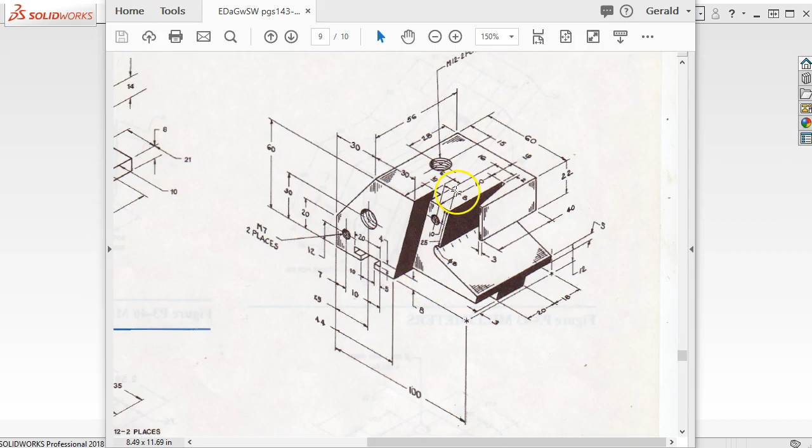We are in metric, and this has a pretty good feel to be a layout sketch.

File new, part metric. Go into the front plane, and first thing is just to get an envelope, start it on size. So 60 by 100, and what that'll let me do is zoom to fit, and then we can start putting in other geometries. So the angle on front...

Can go in at 20, and then we have 30, so base edge.

Okay, what else? L on the keyboard for the line command. We'll bring that at a little bit of an angle. Watching one of the issues is that we're going to start getting a lot of inferences. So coincident, but not midpoint. So that's good.

A distance of 44 to the edge, and the top is another 30.

Alright, the T-slot then, let's just go rectangular, and that dimension will be 20. Let's see, 4 on the height, and then position.

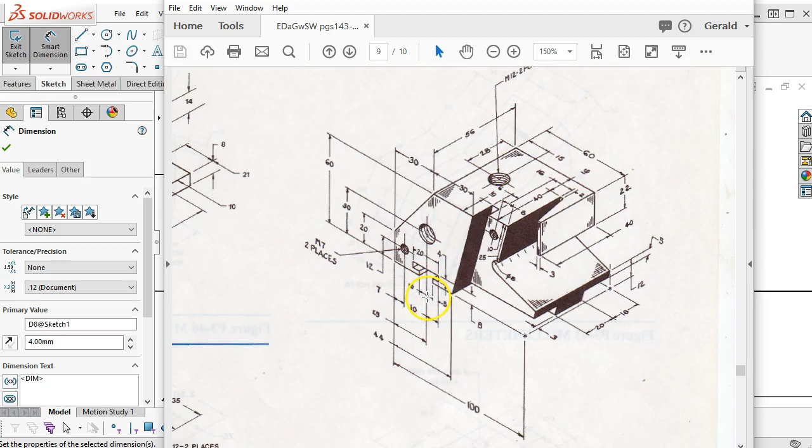Well, kind of looks like—and there we go again making assumptions—but kind of looks like it's on center with the threaded hole. And so if that's the case, then our dimension would be at 17. And I minimized that when I really just wanted to move it out of the way.

There we go. So that being the case, let's go into the center line. And we'll pick an edge and we'll just go ahead and bring that all the way up. Place our dimension.

Yeah, 30 to the edge. It wasn't—it was 10 millimeters to center. There we go, 25 millimeters.

Alright, so 25 millimeters—the 10 millimeters that was in here is actually splitting the 20 millimeters for the sides, and then the bottom of the groove is 10 millimeters. So that goes to 25. That looks a little bit better.

We can pick the midpoint, make it coincident. And we'll drop in a couple of the T-slot lines. Go ahead and mirror those.

So that was 10, and that depth is 5. Okay.

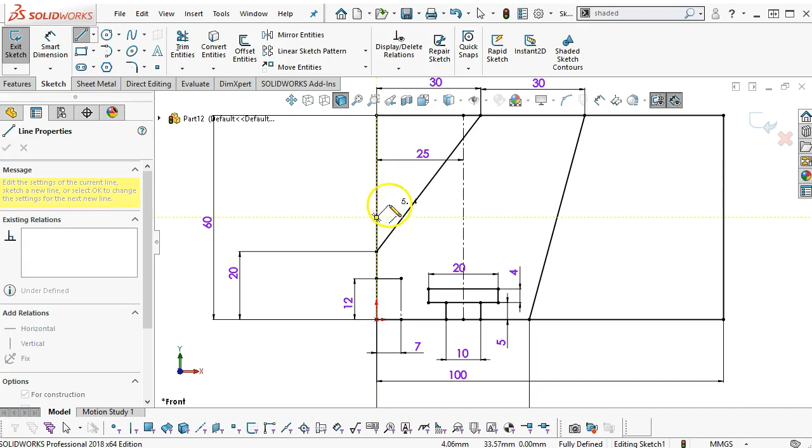Well, that grabbed midpoint. I'll let it have it, go back and delete it. Also grab midpoint of the other side. Yeah, pretty much, so we want coincident.

And then that is 30 millimeters to the intersection. Okay, so that gets some geometry. Let's see.

Well, that one went midpoint. It's not really showing me parallel. There's my inference for parallel, and it's just a touch off center line. And based on the way that this is dimensioned, it won't be between the two lines, it'll be between the two endpoints. Okay, and that'll make a little bit of a difference on the geometry.

So center of the hole, offset, slot. And then assuming that those are going to stay parallel—nope, not allowing me to pick it up. There we go.

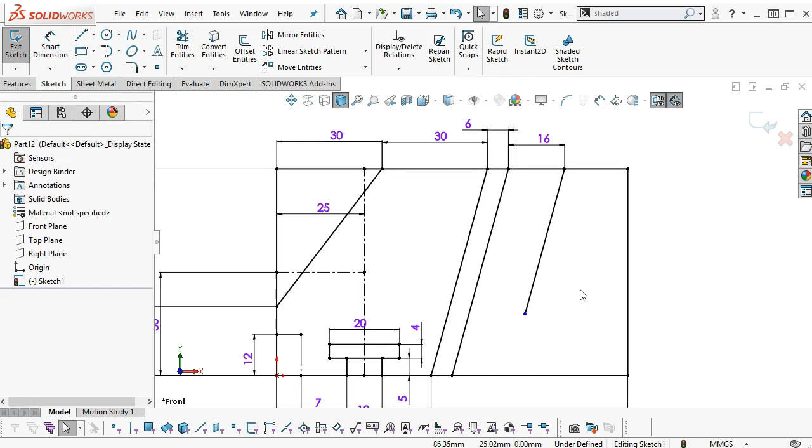Alright, so that does have a little bit coming back this way, and if that's the far end, and that comes off perpendicular, and kind of hard to tell on the dimension what it's looking for there, comes back across to the intersection, horizontal.

Okay, so 5, and then the height becomes 12. We have a length across that line of 25. So we're going to need an intersection.

Let's see, diameter is 8 here in the corner, and I have to assume intersection.

Okay, so rather than trimming those out, I can put a point, but then I can also go to split entities, which is tools, sketch tools, split entities, and we'll split the line and miss it.

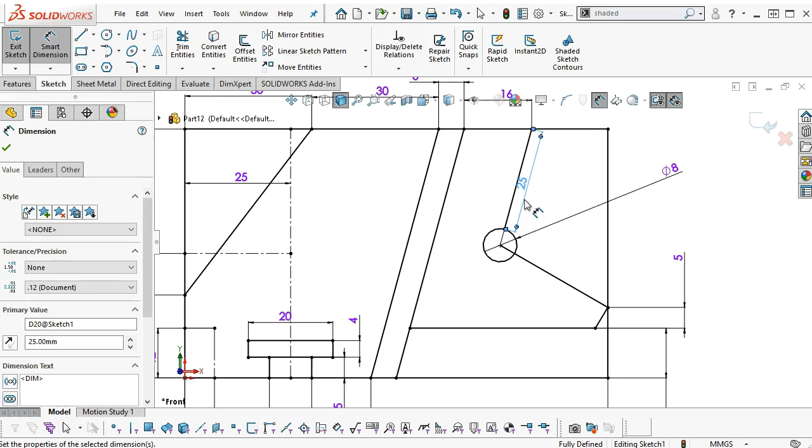It's not too bad. So starting to get some definition.

Okay, and then we'll go 10 millimeters down and 8 millimeters in. And grab the midpoint, so we'll get rid of that. Switch it to coincident.

Okay, so we've got that. There's a 2 millimeter gap, but that one's going to end up being vertical. So from the end point to the line, 2 millimeters, and then another 3 millimeters. Let's go ahead and put the 22 height in.

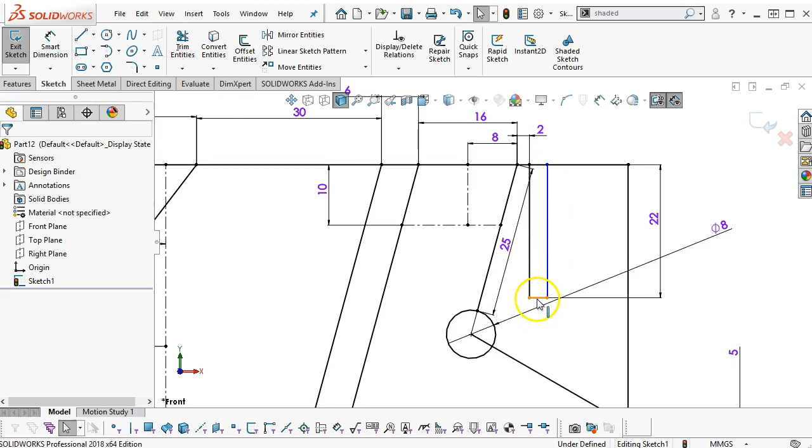And we'll go ahead and close that off. And we have a 2 millimeter on the end. So that's where the inside edge stops at. And we need to figure out where the angle back goes to. So 60 millimeter.

I'll stop there. 3 millimeter. Alright, so that gives the depth. Oh, still managed to miss it. Alright, so, not horizontal. Okay.

So we're going from that point over and then back. Okay, so a whole lot of lines, and we'll try to start making definition out of that.

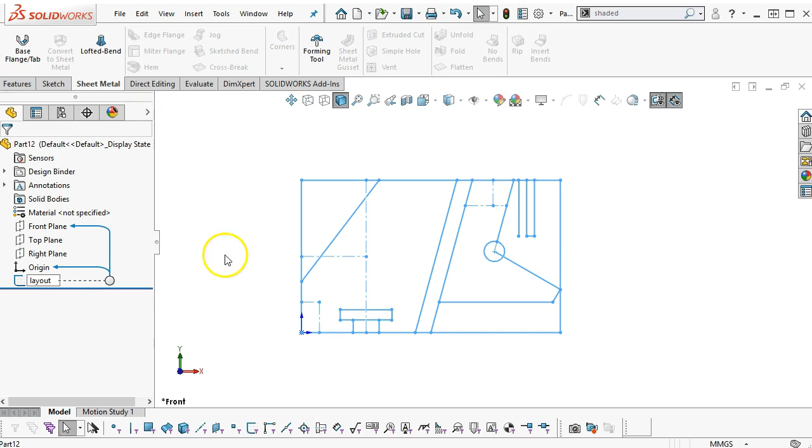So since this is the layout sketch, and I just invested 10 minutes into making that, I'd like to make sure I don't crash and lose it. So this is going to get saved. 341.

Okay, so generating the first geometry. We will go back to the front plane, or into the front plane, and we'll just trace over top. We can convert geometry here in a little bit. So if I trace, I'm just going point to point, making coincident at each of those endpoints or intersections.

Okay, so that gives me my first piece of geometry. Features extrude. We're going to go ahead and take it to the back. 56 for the depth. All right, and then the front face in here that matches up.

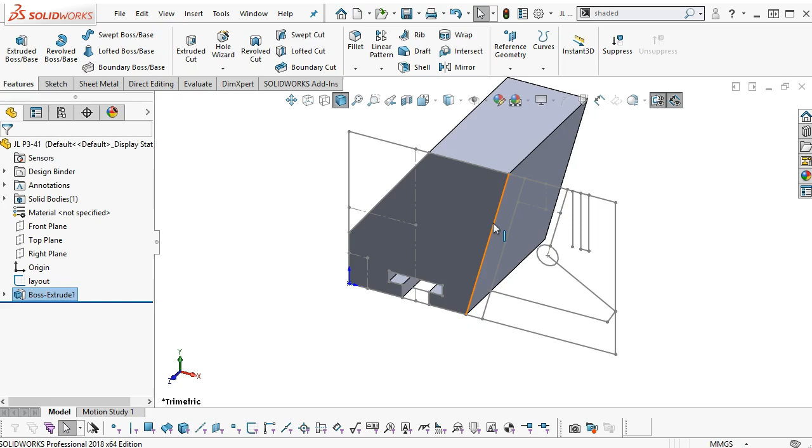We're going to end up with a depth backwards off of that face. So, well, let's go ahead and sketch off of that side. We'll bring it forward. Okay, so convert entity. Convert entity. I think I'm going to go ahead and bring it this way.

And the intersection. This one I think we will trim. So convert entities, and then trim entities, trim to closest, removes the notch. Oh, you know, that was tangent, wasn't it? Darn it.

Okay, so if we make that correction here, okay, so we take the on edge off, and let's see, one of the coincidences, I'll bring that back and go tangent. Okay, so this is still 25 millimeters. That comes back to its edge, and I'll have to correct that in the layout.

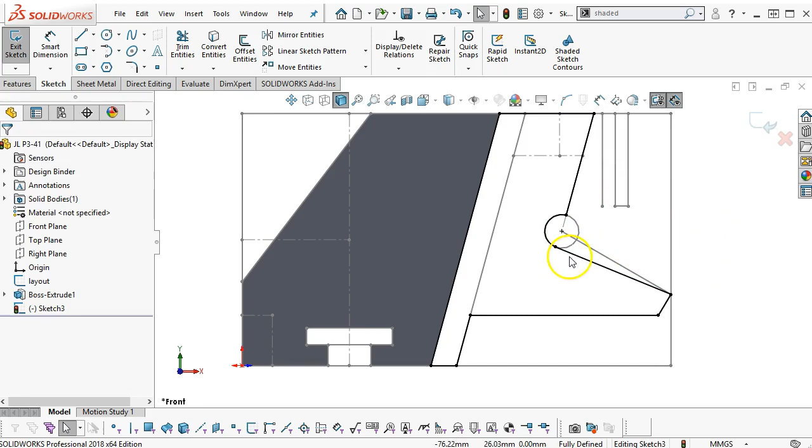Alright, so based on our dimension, we have 16 and 40, so 10 millimeters shy. So features, extrude boss base. This is going to go 46 millimeters. And we'll reverse the direction, bring it up to the geometry.

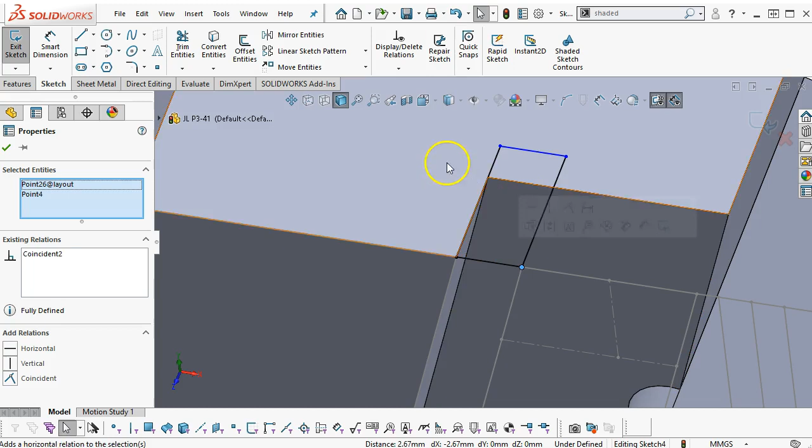Okay, on the 46 then we have a notch that comes out from that point, so sketch on the top face. Start from there and come over. We'll let the sketch figure out the width, and since I don't know what I picked, that must have been the bottom of the slot, so Control Select, and then those become coincident. Depth is 15.

Okay, so that gives us the notch, and then now we could use that, but I think we'll just go with the extruded cut. Set that the direction is along that edge, and it goes through all. Okay, so far that's looking good. Control S to save.

Alright, so another piece of geometry. Let's see, that one's 18 off. Interesting, that's going to come up with all those steps and without any radiuses be very difficult to manufacture.

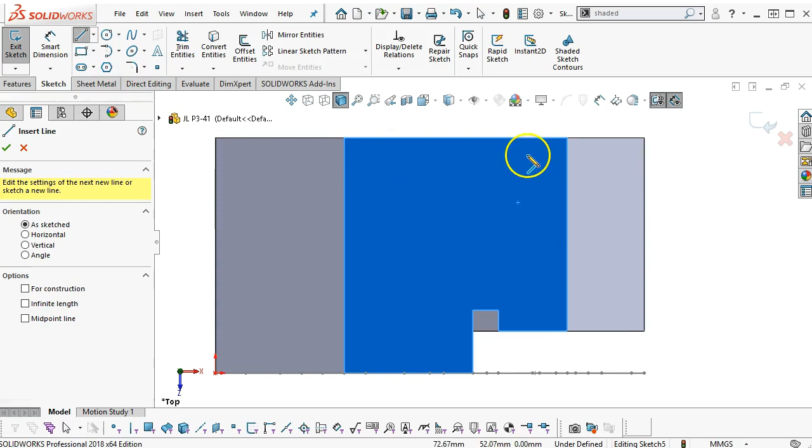Alright, so pick up where we left off. I want to overrun this one just a little bit, and we'll bring it forward some distance. The over and the back and the tie-in.

Alright, so as long as it's intersecting enough that I can compensate for the angle. Let's see, at the very least it would need, I can project that edge into my current sketch. At the very least it would have to be collinear with that. Alright, so that edge and that line go coincident. And that point and that line go vertical. That point and that point go vertical.

Alright, and then we need some depths. So 40 for the depth. We had 16 to get to that edge. That looks pretty good. And then our intersection is to 22.

And reverse the direction. And just a little bit shy. That is some strange geometry.

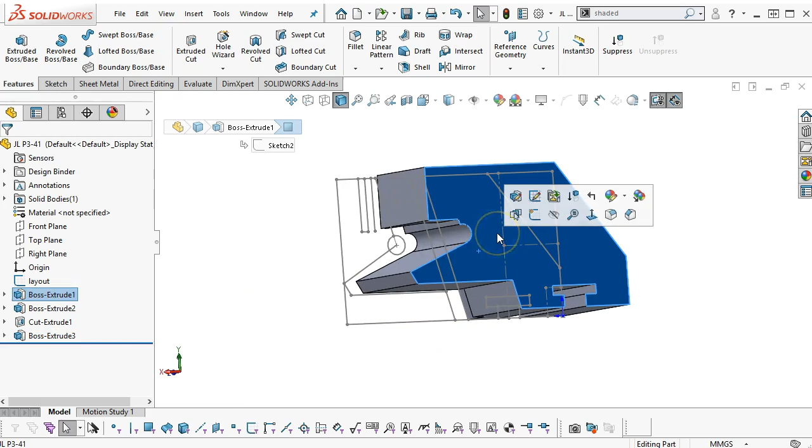Okay, coming off the back at this point, I should have almost brought it forward, but we will pick up the edge.

Even though I'm sketching on this back face, collinear, that notch, that slot, is going to be able to extrude. The from plane offset 18 millimeters, and we'll see which way it goes, then reverse it, and reverse the blind condition, and it goes 20 millimeters, so it gets into the geometry.

So in another step, strange geometry. And we'll hit Control S to make sure that this gets saved.

Alright, I think that's the majority of the solid. Let's see, we have an M7. It's not defined as depth or as a thread, so S key, hole wizard, to depth, drill sizes will go down to 7 millimeters.

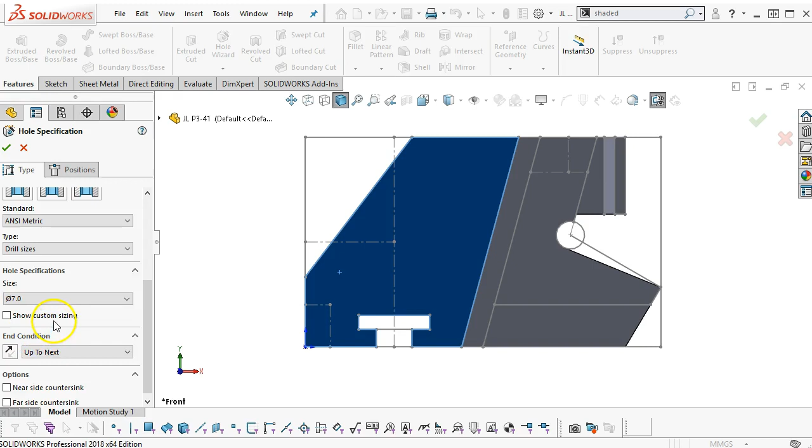Up to next, set a position, find the intersection, go ahead and accept. You can see that it goes through. Let's see, was there another M7? Oh, 2 places.

Well, it almost looks like, well, they either put shading, I guess they just put the shading on it, but it didn't call out as threads.

So, that being the case, let's go ahead and instead of going back in, I will edit the first sketch and we'll put another point into the sketch. That places it all the way through. Even though it's out at this sketch plane, it'll find its way all the way through the geometry. So that does the same thing as editing the feature, going into the position, adding the sketch point out of the hole out of the positions.

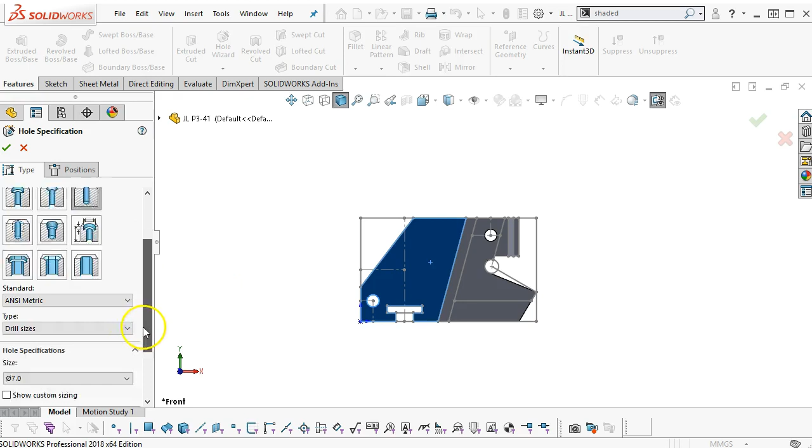Next one is the M12. So we pick the diameter, we'll stay with up to next, find the intersecting center lines for geometry, go ahead and hit OK. Should have the same parameters.

M12, up to next, position on that face. And then dimensions are 28 in, and 15 over, picking up that angled edge.

That's not really a datum that I would be comfortable with. I really would want to try to bring that off of an edge that we can actually measure from or pick up.

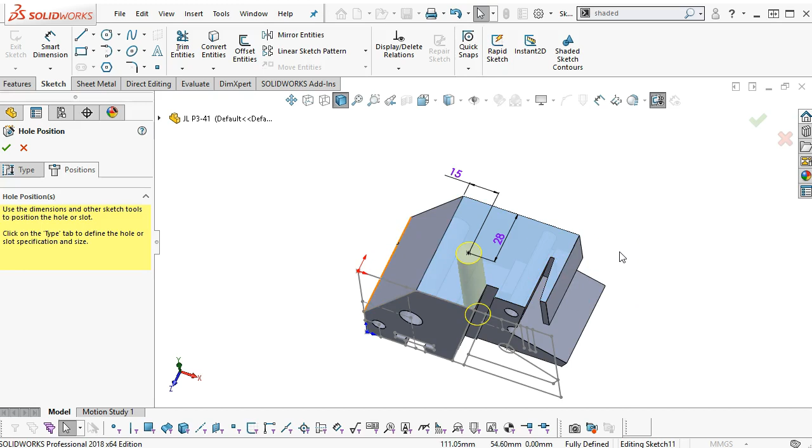Alright, that looks good, and I think that's got it. Okay, so we go back and we hide the layout.

For design for manufacture, some of this geometry, how much should we end up with here? About 3 millimeters. That 15 millimeters, if it could go to 8 millimeters, would clean up all the way around that edge, and then machining in this position wouldn't end up with a step.

If that was locating something, or not just for clearance, then the other option would be to bring this up 3 millimeters. If we can't do either of those, then both of these internal edges, and there is no fillet call out, but both of these internal edges at the very least would need to have a fillet.

And 56 millimeters is a long ways for this small 2 millimeter geometry, so that one's going to be questionable. Alright, so let's go ahead and put a 3 millimeter in there.

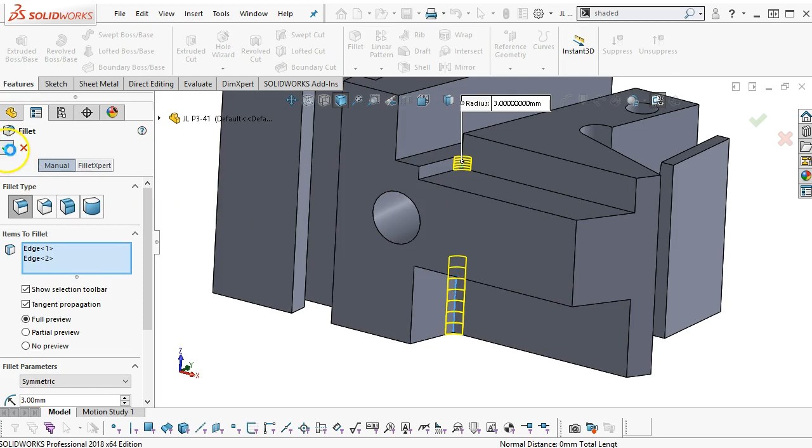Alright, so it has some kind of blend. 2 millimeters is about 80 thousandths, so getting into that corner, well, there again, what do we have for distance? A little right there at 2.2, so let's see if we can get a 3 millimeter in there.

Alright, so even with the blend, if it can come over on that side, it's a long end mill for 6 millimeters, so 2 inches. Let's see, we had 4 millimeters, 56 is a little over 2 inches, and then the 8 millimeter on the diameter is 4 millimeters in corner.

We're into wire EDM territory on some of this, so in that case I'm going to have to go in and burn out that geometry.

On this notch though, there's not a lot we can do there. The wire can't go through. End mill's going to have to go through a nibble, and being 30 millimeters deep, pretty close to a little over an inch.

That's going to be a problem for the design. So, alright, so that last fillet is a maybe.

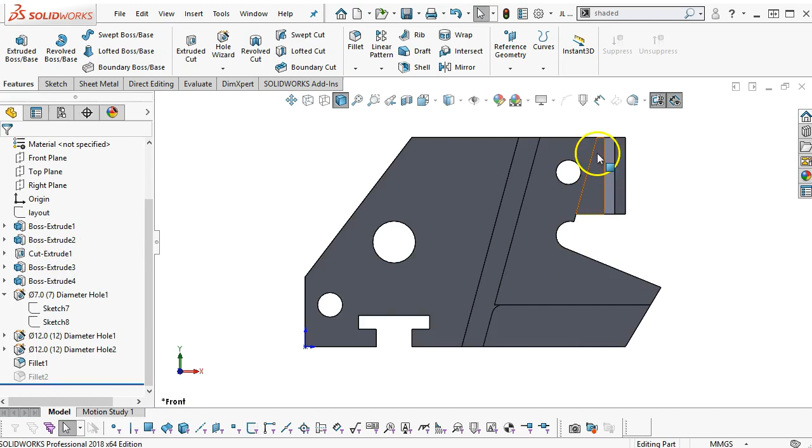So I will suppress it from the mix, and then the big issue is whatever this geometry is, maybe we need to make this piece separate. Locating pins, fasteners, somehow bolt it to that face. On that fun piece of geometry, still have questions on the design review, and come up with some better method.

So I'll save it one more time, and we'll take a look at 342. 342 has the angled face. So this kind of L-shaped piece, and then say we just draw the kind of trapezoidal shape and extrude it up.

Alright, so we'll go ahead and close that. This one is in inches. We have an inch again. So, new part, inches. Let's see, from the right plane then, sketch.

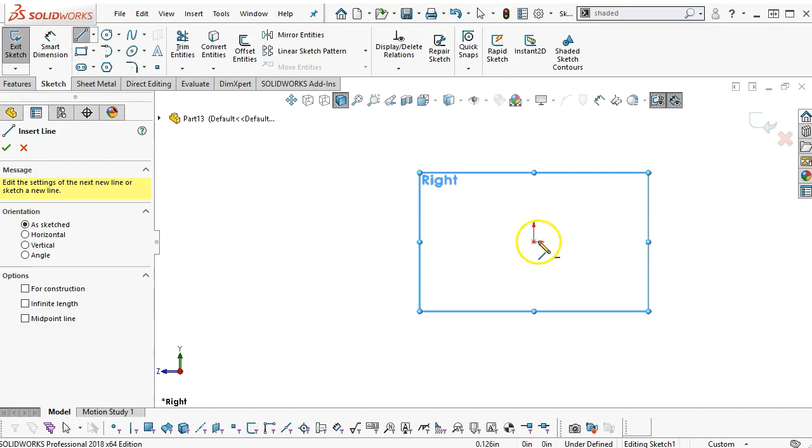Up, over, back, down, and over. Put some dimensions on it. So we're 0.75, or no, 0.88. Again, with the two decimal places, we have to decide what kind of tolerances we're going to hold on this piece. If it's a casting, it could be pretty wide open.

If we're machining, we really have to think about that angled piece, because that's a lot of material to remove. And if we could make it a separate item and bolt it in and get the same kind of rigidity and strength for whatever function, then we'd want to go that route. So I'm going to take this out to 3 decimal places.

So 0.88 is 7/8, which is 0.875, and our overall length is 2.75, and then the height, 0.38 goes to 3/8, 0.375, and then the length 1.25.

Alright, and then features, extrude, and it doesn't really matter, we'll go 3.25 on the length. Okay, so 2 holes, 0.75, 2 places, doesn't show it on the back side.

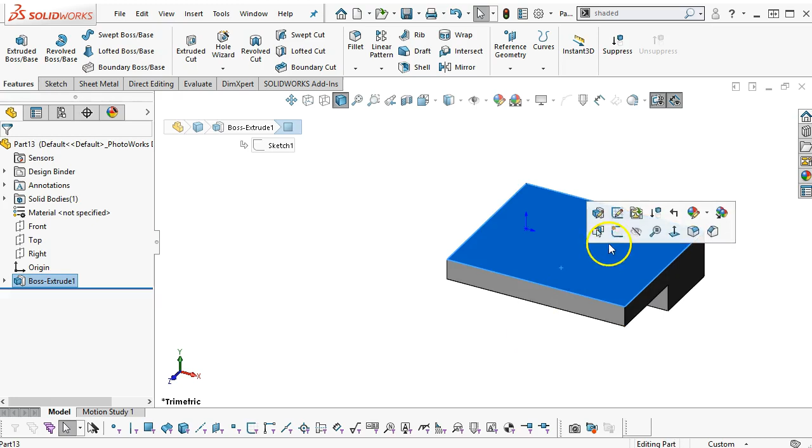So let's go ahead with the angle geometry. And if we go parallelogram, we should be able to pull that off and go to the side. Alright, so anytime you're working with the other items under the rectangle, keep in mind that each of the last 3 will require that you do an additional drag to further define the geometry.

0.25. See, 1.5 inch, 1 inch both sides. Okay, so I guess that's how they're setting the angle. Alright, so that updates. Features, extrude, 1.5 inches.

We have our shape. Alright, so diameter 0.75, 2 holes, and then we have the 0.75, 2 places. 0.375 for 4 holes, so it'll be a mirrored pattern.

So let's go ahead into the hole wizard. We'll look at this from the top. And I need to switch back over into inches. And we'll pick up the fractional drill sizes and go to 3/8.

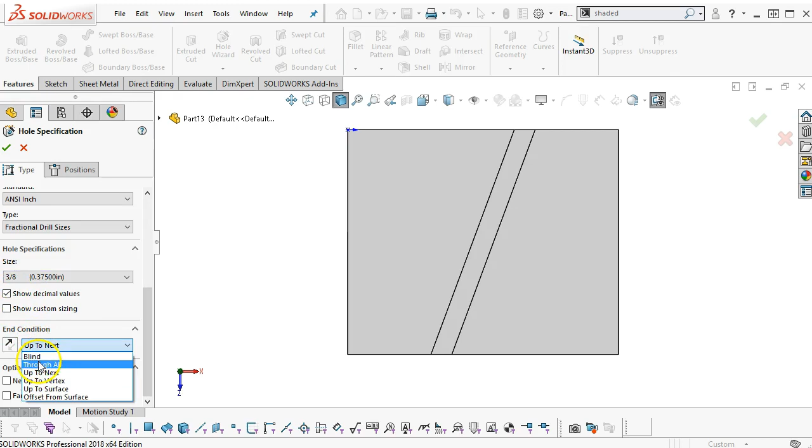Alright, and then show decimal values. Also will pull up the decimal equivalent so that you can verify you got the geometry. We'll make this through all and face to put it on.

Alright, so when I go to generate this center line, I'm going to have a different midpoint because I could have put that on first. But let's go ahead with select midpoint. It can be projected into current face, and those just become coincident.

And I missed. Let's go ahead and grab those. Mirror the entities. We'll go 0.75, 2 places. And then 1.25. So let's go ahead and get those vertical.

And then it's given as 0.75 off of the front edge. Okay, so those look pretty good. Alright, and then the 0.75 diameter. I'll open up the sketch.

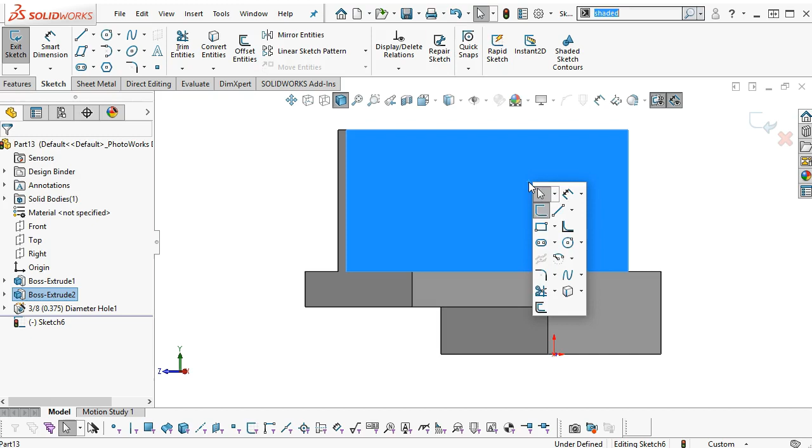It goes normal too. They're showing, let's see, off of the top, and off of this back edge. So picking the face, S key. Oh, I went back into the sketch.

Let's stay with the hole wizard. Control 8 goes normal to it. Fractional drill sizes, we're going to jump up to 0.75. Set the position. Oh, and got a little bit messy there, so we'll just jump back into the sketch.

And apparently, nope, those aren't moving together just yet. Horizontal. So not quite sure what I picked. Okay, so off of the edge, 0.875.

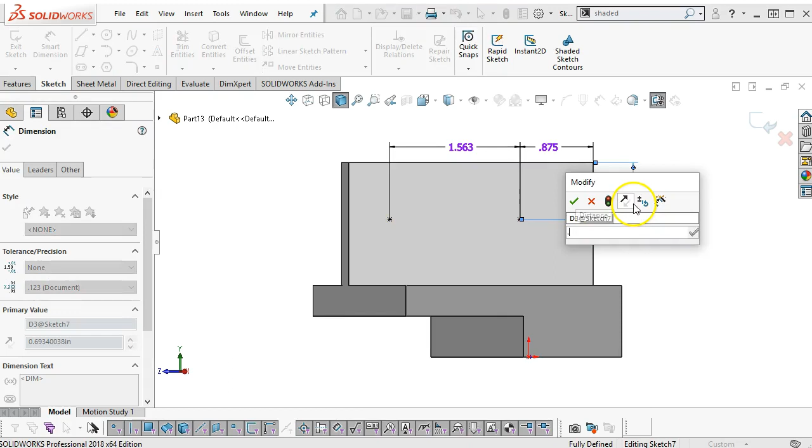1.5625 for 1 9/16, and 0.75 from the top. So that doesn't quite look like theirs. Double check the numbers, make sure I didn't mess up.

No, it's definitely not centered, but one hole is shifted quite a bit. So that'll be a question mark for design review of where that value came from. All right, same thing when it gets into the assembly. When we have more information, we'll do a little bit more with it.

Kind of looks like there were fillets, but I don't see any call out for fillets, so save it and go 342. Okay, quick double check and we'll go.

Alright, 343. Given that this is 10 millimeter plate, that's going to be too thick to bend. It's also going to be a pain to machine with the angles, but let's go ahead and see what it looks like. So 30-degree angle.

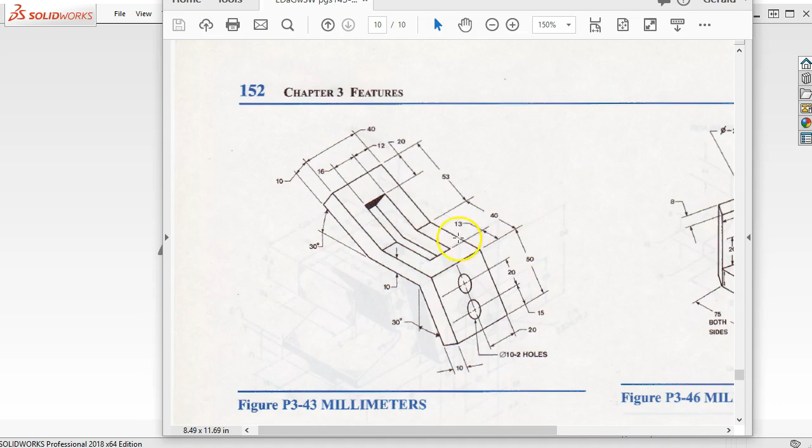Given that this is our flat, I'll kind of start that at the midpoint and see where we get to from there. This angle and that angle need to overrun each other, and the holes aren't a big concern. And it is a metric part. So File, New, Part Metric, Front Plane, Sketch, Line.

Let's just go ahead and set it at the midpoint so that I have room to maneuver, one goes that way, and one goes that way. Alright, so my angles, based on what I'm given, I don't need the end point for this one.

And this one, I will need the end point if I want to stay with the 30-degree dimension. Alright, so lengths, and this is going to be the top of the part. Double checking for the offset. Based on the offset position, 40, 50, and 53.

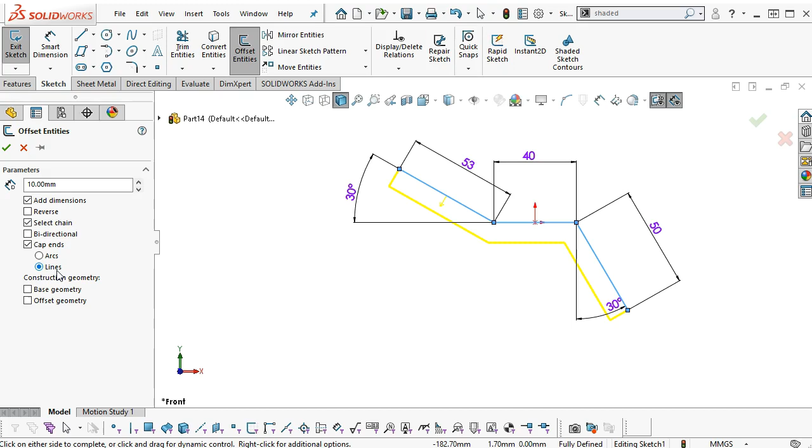Alright, so as much fun as that is, I'm going to select the chain, go into the offset entities. It's 10 millimeters, we'll have it cap the ends with lines, and that will generate the rest of the geometry. And then our extrusion is 40 millimeters.

So we go to isometric. That's pretty close, maybe not perfect, but pretty close. Alright, so I want to overrun this lower edge at least for the notch, and then overrun the top.

So that being the case, I'm going to go into the wireframe. We'll get back into our corner rectangle, and I can select midpoint, select my line, make those midpoint. Oh, and I don't think I wanted to infer that relation, so I need to double check, and I pulled the wrong dimension, so, not yet, 16.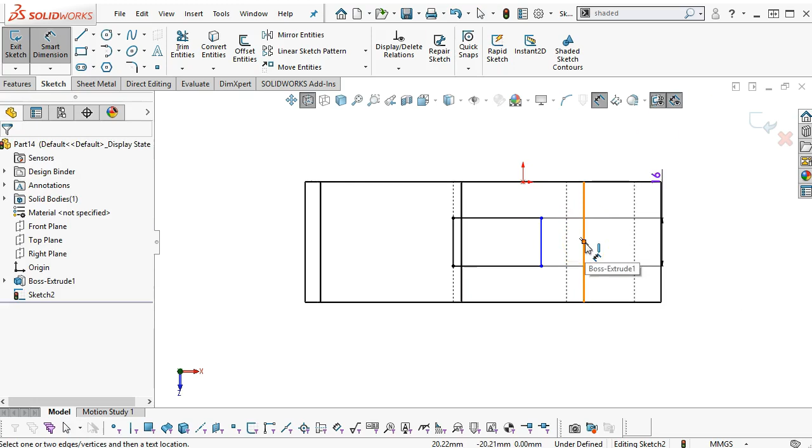Alright, so that being the case, yeah, it did infer somewhere. I need to get rid of that coincidence, and we'll pull that back. Off of the edge, 13 millimeters. And again, from the detail side, we need much better datums to manufacture from.

So extrude cut, and this is going to be an up to next. Alright, on the intersecting sketch then, I'll go to the lower edge. Should be able to pick up that same geometry.

That'll make the overlap intersecting cut 20 millimeters from the top. Let's see what that looks like. Extrude cut, up to next. Okay, so that gives us the shapes.

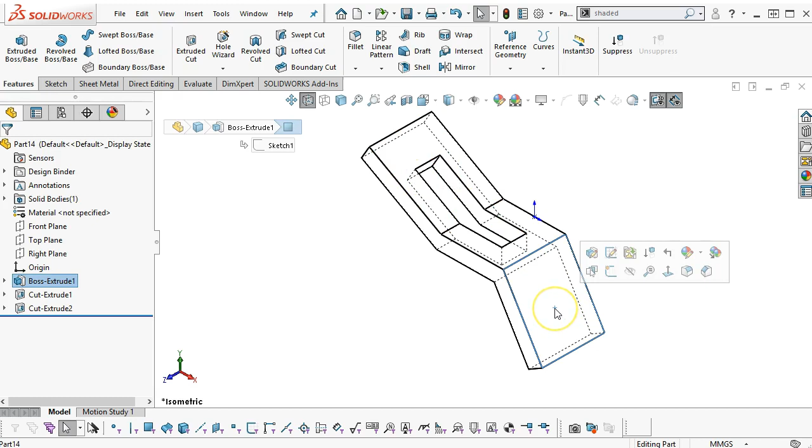The other thing is without any of the radiuses, this is already a big chunk of material that we're going to lose quite a bit of stock from. So if we can save a little bit on the machining, we really need interior radiuses on those, on that pocket.

Alright, 10 millimeter diameter holes, so back to metric. Drill size, scroll down, 10 millimeters. I'm having fun with up to next, so we'll stay with up to next.

20 millimeters, so these are on center line, and we can keep them on center line by going midpoint to midpoint. Bring those to coincident with that center line, and then 15 and 20.

Go ahead and accept. Alright, so design for manufacture on this part, look at it from the front. One of the things that I would like to know is relative stock sizes.

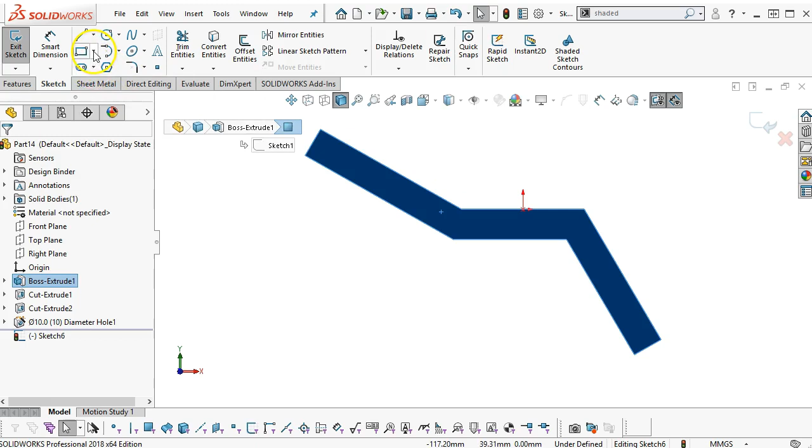So if we go into the sketch, pick up the other rectangle, and I'll go 3-point corner rectangle. And we'll try to find where this touches the points and yields kind of the smallest piece of material. So if I have to machine this on, I'm going to go a little bit over size.

Let's see, that'll be another larger point. And we'll go coincident, and depending. Okay, let me have the point. Nope. That's just messing with me. Okay, let me have it. There we go, coincident.

Alright, so we're going to lose a lot of that material, and there's no easy way to get into it. So machining from this orientation, I'm also going to need internal radiuses on the corners. If we start off with the block, we have bend lines, but we also have more setups. Alright, so I'd have to do one setup, remove this material, come over, set up an angle, remove this material, make that blend, set up on the end, remove whatever little bit of material's there.

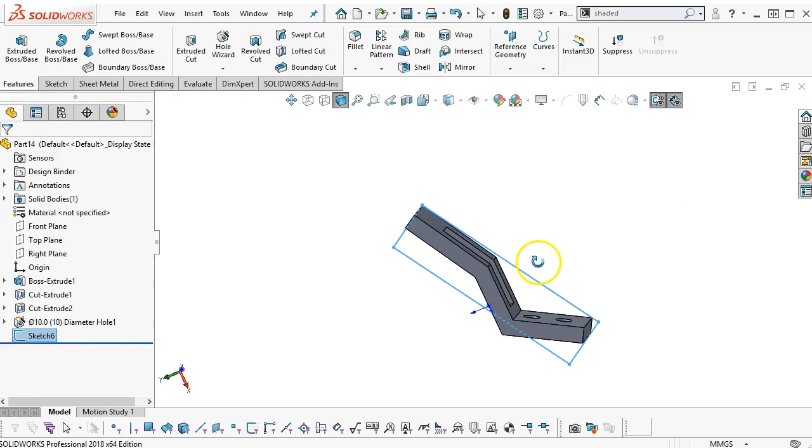And then kind of the same thing is bring it in. We got some long lengths here. So this would be a manufacturing challenge piece. Still have more decisions to make on that piece, it's not done yet. Alright, so 343.

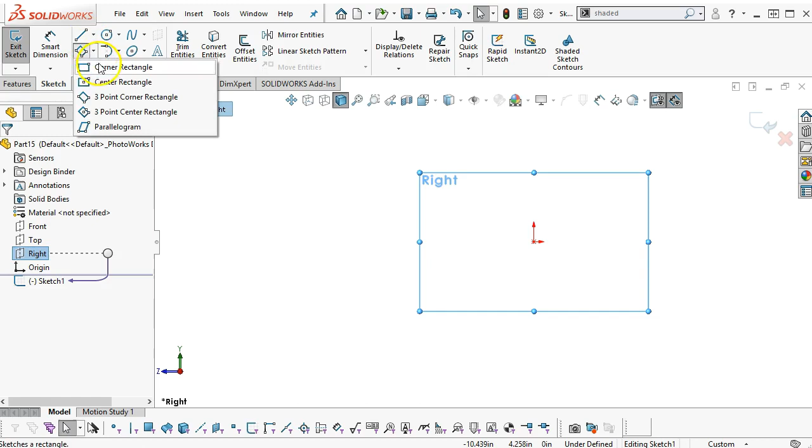So let's start off with that. We'll go File, New. This is an inch piece. I'm going to round to 3 decimal places. We'll go to the right plane. And we have a height of 2 inches.

And across this lower leg, 1.75. And we'll switch back over the line, and coming off of that angle, perpendicular, back up. All right, so looking at this corner, based on length, 2 1/4 and 1 1/4. So 3 1/2, that's too long to machine.

The angle, whatever the angle is, can't even really get a form cutter in there. So we're back to having the discussion about wire EDM.

All right, so 0.5. And length is 1.625, 1 5/8.

And do we have an angle or a depth? 30 degrees. All right, so off of the top edge, coming down 30 degrees. That will give me the shape. So this will automatically send it into contour and region, basically leaving this as an overhang.

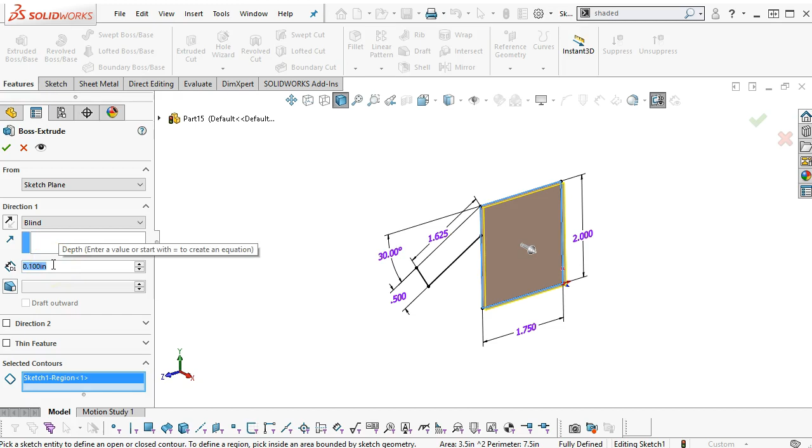So when I extrude boss base, we pick the region, and this overall distance, we said 2.25 plus 1.25, we'll get 3.5.

Going back into that sketch then, go back into the extrude, pick the next piece of geometry. It's just the sketch region 1, so 2.25. Slows it down. And then on the edge, we're going to pick up that geometry, and it's kind of a toss-up.

So let's see, coming off of the end, 60 degrees. Let's move that back up before I apply the dimension. Can sometimes change the state, but positive to negative. But if we don't have to, it's usually a little easier. All right, features, we'll leave it open, extrude through all both. Go ahead and accept.

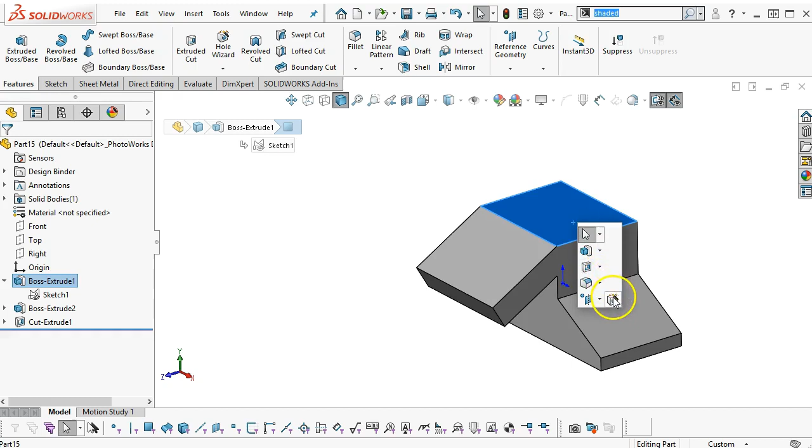375 by 1/2 inch deep, 4 holes. So picking the face, into inch, stay with the fractional, 3/8 of an inch, and blind end condition, 0.5 depth. And again, 0.5 is to the shoulder.

1 inch by 0.75 on the pattern. All right, so those two horizontal, those two horizontal, those two vertical, those two vertical. .75,

1 inch, and then there again picking up off of kind of the weird datum, the lower edge, and tend to go to the outside, 1.75, so it would have worked either way, symmetrical, just strange.

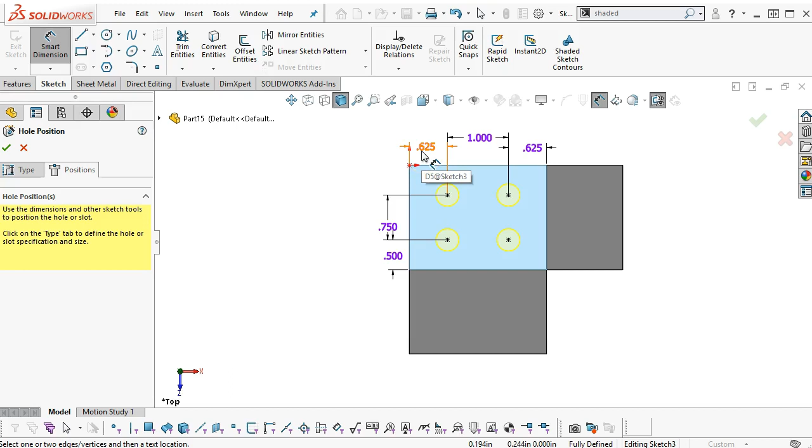All right, so 0.63 off of our leading edge, so 0.625. And this is probably one of those instances that if everything adds up right, that I will make this dimension driven. I'm going to say don't show again, so it'll ignore that particular pop-up from now on. But if I had left this at the 0.63, then this would have read 0.625. If we're looking for symmetry, then I would really like to see these numbers be the same number.

Alright, so we'll go ahead and set it. And then, let's see, looking at it from the end, one thing to keep in mind is that the Hole Wizard does generate the drill point. So 118 degree drill point at its depth. If we use 135 or 140, some different geometry, that would be the minimum depth that we would want to machine to.

3/4 inch by 0.25 deep. 2 holes, both bottom drilled. All right, so those don't quite go through. Bottom drilled. So I'm assuming that means since we don't see a drill point and probably would go through on the 1/2 inch anyway, this is going to be a pocket.

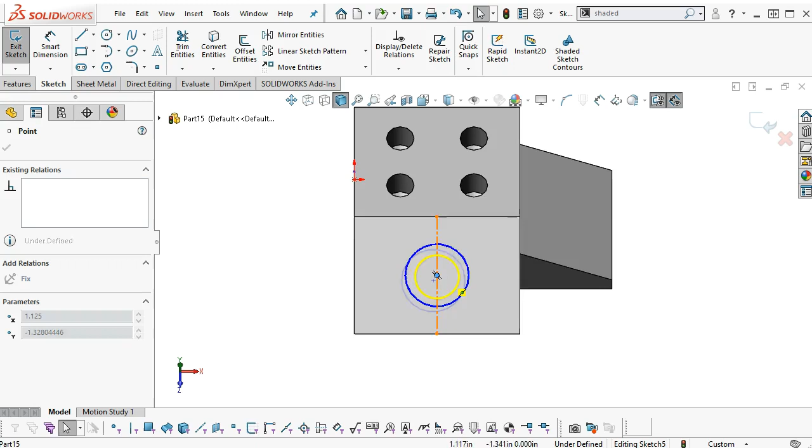Alright, so 2.25 and 1.13, that can be centered. And then 0.88 and 1.63, we're going to go right to the midpoint, and then we'll verify that dimension. 0.75. Alright, 813, so wasn't quite centered.

That's right, 1.75 would have been halfway, or the length for halfway. Okay, so take off the midpoint. I already have a dimension. I'm over to other, uncheck the driven, double click, 0.875, and then we'll just make sure that it stays coincident. And features, extrude cut, 0.25 deep.

Alright, so not that I would do it very often, but I can take that geometry and Control C, place it on the face, or select the next face, and Control V. It's going to warn me about the relations that it can't infer because or solve because it has changed those dimensions.

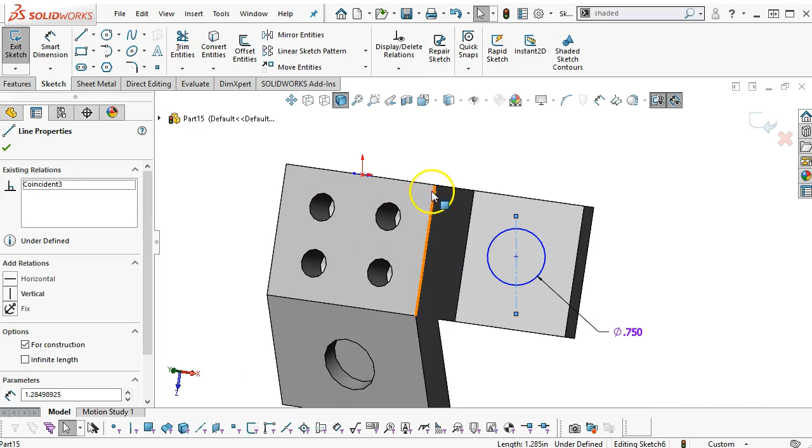But I should be able to come back to midpoint, and now, let's see, is that still set to vertical? Yes, so vertical goes away. And we'll switch over to horizontal. Find the midpoint.

And even though it's on that face, okay, not exact. Let's go back to midpoint. And 0.75 from the bottom. And then go ahead and accept.

Alright, so whatever that notch relief is doing, that would be a question for design review. 344.

And 345. Alright, so 345 is one of the more interesting. I think it's been done in a few previous videos.

So we're going to start off with our cube shape, our rectangular prism, and then work back from there. So we're going to need some geometry for the direction of the cut. Since this is the high side, I can probably go ahead and include the 30 degree.

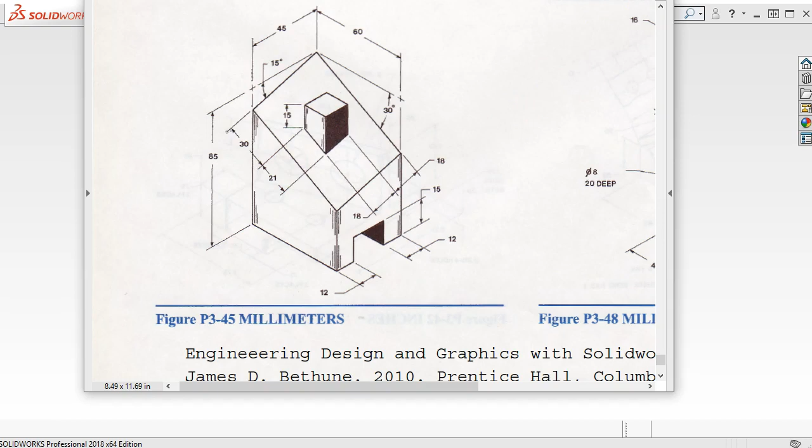Okay, so File New, and this is in metric. Front plane, sketch. We'll draw the rectangle.

And then remove the horizontal dimension, tilt it down just a little bit, 60 millimeters on the front, 85 on the side, and then 30 degrees. We'll go with the end point and the line, set the direction,

And then features will extrude, and this is going to be 45 millimeters.

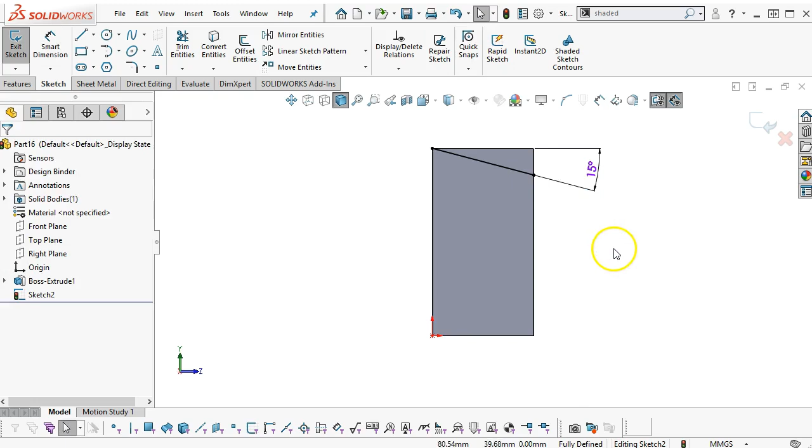Okay, so on the back side then, we go into the sketch and tilt this down 15 degrees. And should be able to leave that an open profile. We'll find out here in a second.

And it's going to follow that line. So features, extruded cut.

Stay through all. Side to cut's okay. Direction of cut is along that edge. And we'll see how much that dips. Okay, so that gives us our compound angle.

Alright, so the square is a little interesting. Say if we go into this face and open up our sketch, we're going to be dealing with our

points. So let's go parallel first. And there's going to be some interesting inferences.

So, alright, so vertical, and then that should be vertical. Those two ended up parallel, so I'll make that parallel. And then vertical. Alright, so I think I have this.

Off of the side then is going to be, oh, went to the wrong side. Alright, so let's get rid of that. 18 millimeters.

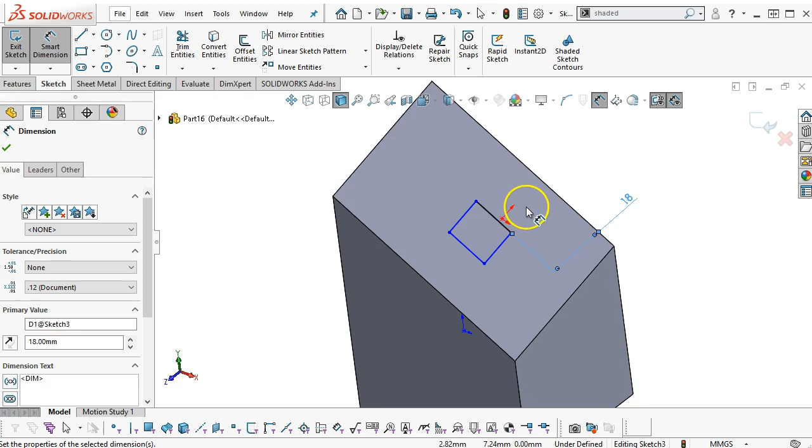And then another 18 millimeters. And then we have 21 millimeters.

And position puts it at 30 millimeters. Okay, so kind of a strange location.

And that gives me the prism, but it doesn't give me a direction. So let's go ahead and accept. I really need that location first

to generate a plane. Okay, well, we'll see what we get.

Alright, so in the features, reference geometry plane, we'll start at the front, bring it in some distance, open up our sketch, go into the line geometry, pick that edge, or that vertex that has the 15 millimeter dimension.

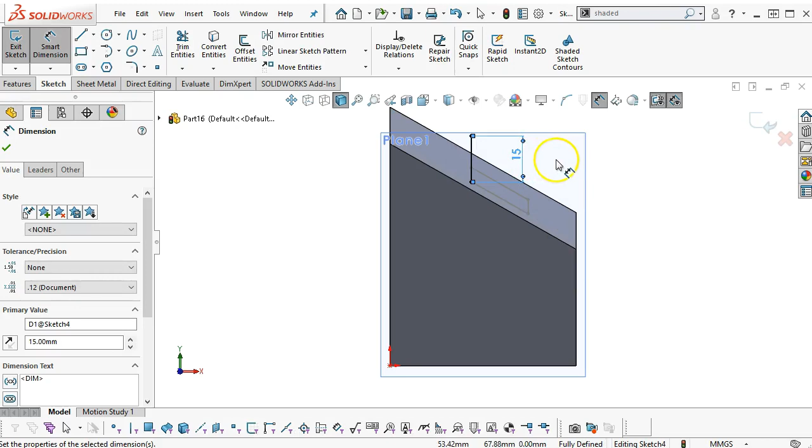Okay, and even if I have to generate that geometry, say I don't know if that has to exist before or after.

So let's go ahead with the extrude. I guess it doesn't matter. Direction of the cut, and then up to vertex. So problem is it didn't end up being flat.

So it kept following the geometry. So not exactly what I wanted. Okay, but we still need that geometry, so we're going to hide.

And we'll call this the angled face, and this the height. Okay, so they're going to participate in the construction.

We just got to get it there. Select the chain, convert the entities,

and that forms our square on the bottom of the part. Features extrude boss base up to vertex will give me to the end point. Positive into a positive is no net gain, and it gives me my geometry.

Okay, so the angled face sketch can hide, and the height can hide, and then that leaves just the notch through.

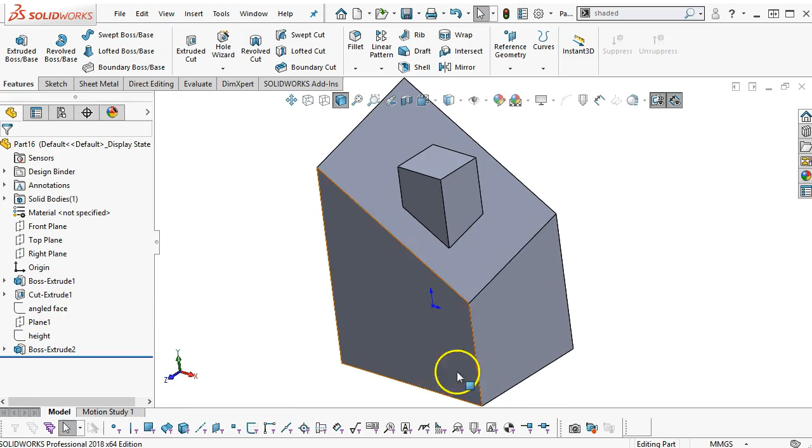Select midpoint, go to midpoint, and 12 off of the side. And 15 on the depth.

Okay, I'm going to go ahead and save and bring that back in for comparison. The main complexity here is that they've generated this geometry in relation to that angled face, and on the compound angled face is difficult enough.

So this actually ends up being, I thought it was a fairly nominal number, but not quite square either. So if we were expecting one thing, that's pretty much what the numbers give us.

The other issue is, same discussion we've always had, is manufacturability.

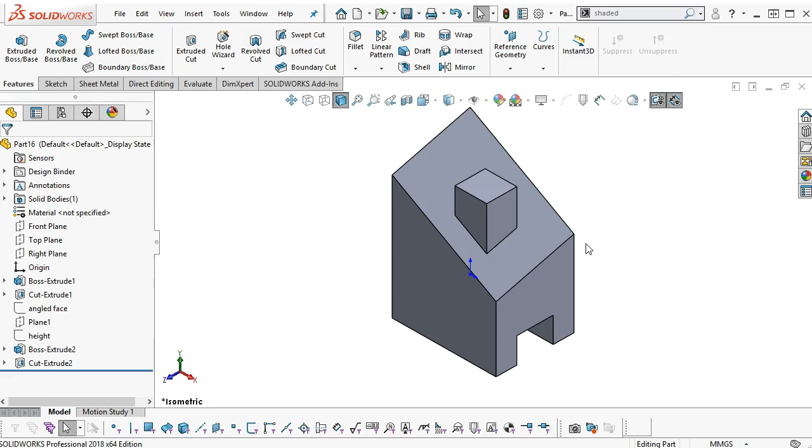If this is a 3-axis part, then what kind of radiuses can I put in to generate this shape along these edges without having to do multiple setups or trying to blend the geometry?

And so let's go with a 3mm, and that would be close to a 1/4 inch end mill, trying to blend into that shape. All right, so what if scenario, we'll go ahead and suppress it, make sure it saves.

Okay, doing 346. Just a couple more to go. Chapter 3. Alright, so strange shape, but not too complicated on geometry.

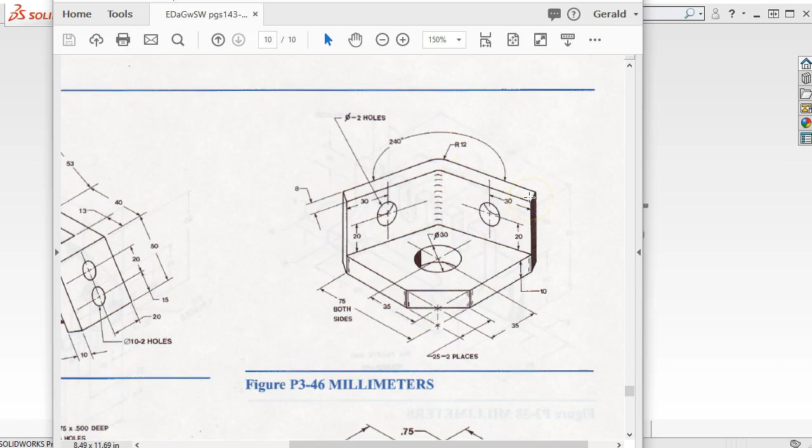75 to the edges, and then do they give us perpendicularity? No. Try to figure out what's going on. Okay, so 2 intersection, and that one kicks back 240 degrees. Makes me wonder if it's perpendicular to that face. Alright, so we're going to have to make some assumptions if I don't see that dimension materialize here.

Alright, so on the top plane, and really I would like to draw this along one of the datums, but I guess that front datum is about as good as anything. So part metric, top plane. If we go with the circle, 30mm as the center. The dimensions are off of the origin. So geometry up, over, and back, and bring it to the center.

And go center line to midpoint. Make sure it's vertical and it's coincident to the origin. These two get mirrored to that one, and our dimensions go 35 and 35.

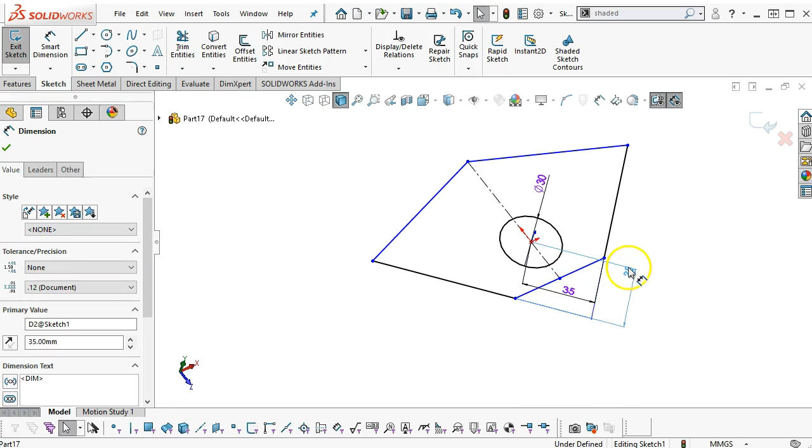Those okay, for the angles, then we can get to perpendicular. All right, depth-wise is 25. So let's do a virtual sharp here. Select the 2 lines, do the intersection. And we'll move those over just a little bit so we can get to that point.

Alright, so smart dimension from the sharp back to the point. Stay close so we get a linear distance. And that was 25, not 35. Okay, so that gets us to the shape.

240 degrees on the angle, and did not get the second one selected. And hit Control Z one too many times. My dimension reverted back.

Alright, and then 75 millimeters on a side. Okay, and the mirror will take care of that. Alright, 8 millimeters on the offset. And there again, don't know that it's actually going to be 8 millimeters, depending on how we interpret this coming back, either as vertical

Alright, so bring that parallel, and those two parallel, and then based on the dimension we get 8, and my concern is always that when I go in between those lines we're going to be a little bit narrower because of that linear distance that we're given along that edge is sort of on that face.

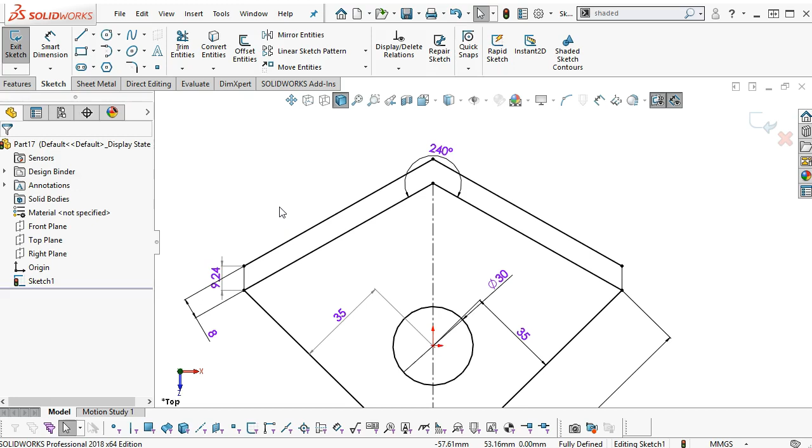Actually, that one does look like it went to the face. So let's go with driven, and we'll switch that one out. Other driven. That will let me edit it, and then I can make the change. So, okay.

Features, extrude boss base, we'll pick the two regions, and distance is 10 millimeters. Share the sketch. Pick the region, overall height, maybe. 20 if it's on center line, that would be 40.

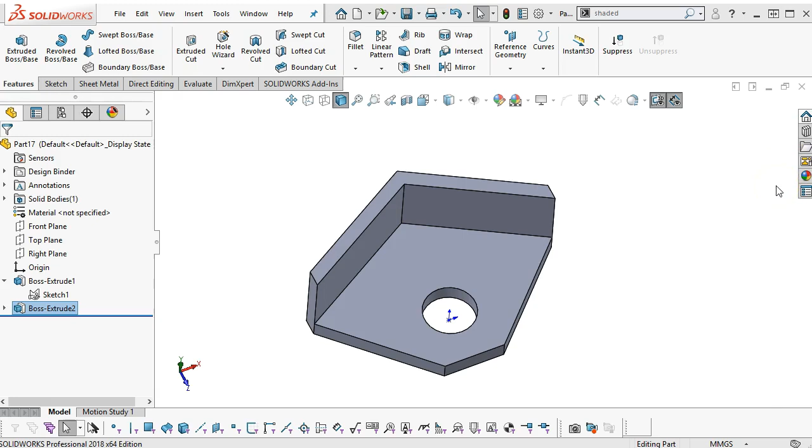I don't see a 50 millimeters anywhere, so we're going to go 50 millimeters. On the sketch. So let's bring this back in. So 20 millimeters if we assume that's center line, 20 and 20 and 10, that gives me 50. And that would be another one of those concerns for when it gets into the assembly.

See, diameter of two holes. Oh, same as? No? Well, you're given a diameter, but then did not give us a complete diameter. Sure doesn't look like 30, so let's stay with the 20 millimeter, and it'll be another one of those things that we'll have to verify.

So question is, well, do we do hole wizard, or do we just do the go through? ANSI metric, drill sizes, scroll down to 20 millimeters. I'll go to an up to next and set the position.

Alright, so distance in 30, distance up 20. We'll stay. Should have all of the same settings. Set the position. One I'd like to see if I can get is expand this out, show that sketch.

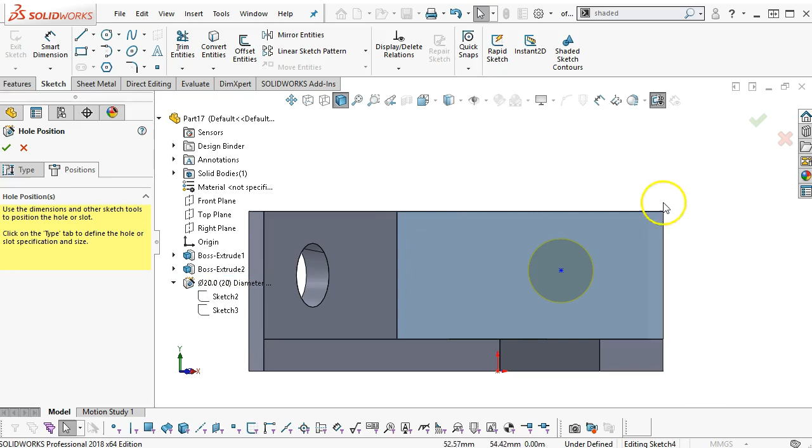And doesn't look like it's going to give it to me. If I can get to that center point, no. We'll just have to go 30 off of that dimension. Come back and show that sketch. Then edit this sketch. And those points can be horizontal.

Okay, so first feature is driving the geometry, and then radius of 12. Well, it wouldn't exactly, depending on how they define it. If it's going to take into account the material, then this is going to be a radius of 4. 12 minus 8.

So we'll make that assumption. Even at the 40 millimeters, that's still a pretty good depth to have to machine out. 4 millimeters, basically a 5/16 end mill. Okay, and 12 millimeters across the back.

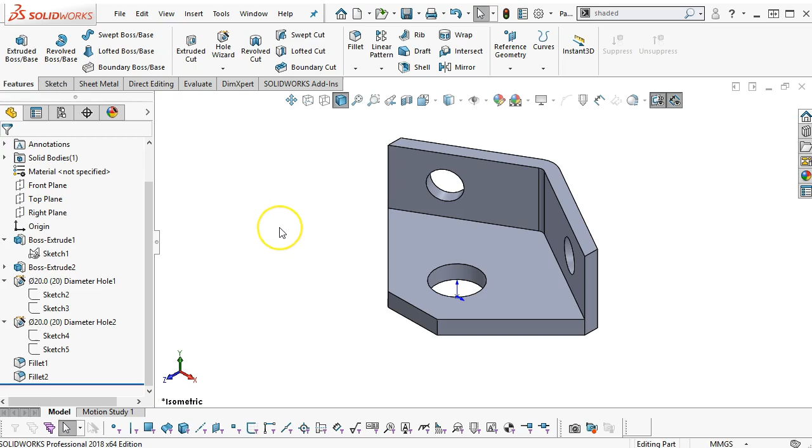Now we'll go back and hide sketch 2, and that one should be good. Alright, and again, it doesn't look exactly like the picture for the isometric, but that's a little closer. Alright.

346. We get 347 up. Alright, 347 has an angle again, and it depends on how much of that angle is going to intersect through. So I'm thinking I'll probably draw this top geometry and then try to work back from there. So 2.5 to 3, and that is to the top side. No, this is in inches.

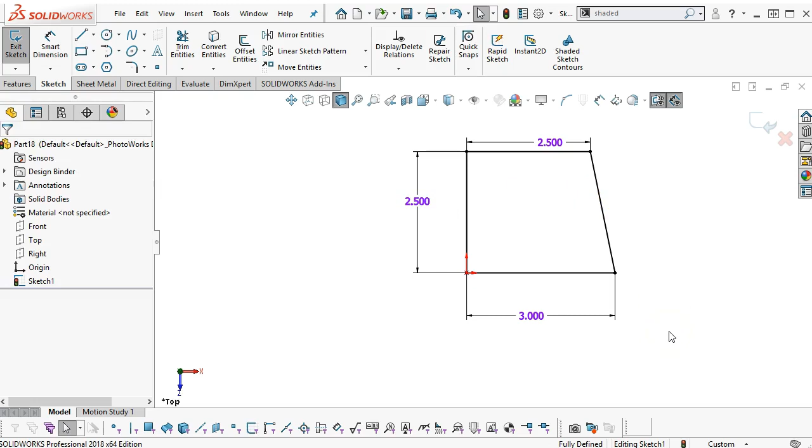Okay, so top geometry, open sketch, draw the rectangle. This time the line on the end, we get rid of the vertical, kick it back, and top is 2.5, bottom is 3, and then overall is 2.5. And to help keep this in reference, we'll go ahead and extrude this down. If it defaults up, we're going to reverse it. And then 0.31, or if we wanted to take it out, 0.3125.

Alright, so drawing on this outside edge, let's go with the parallelogram, and we'll go to the edges, grab where we think it's going to be, because it really didn't show. Let's see, that one went parallel, but I think we can get rid of it and tilt that just a little bit. Alright, if we go that to perpendicular, then 60 degrees off of the vertical is going to look like that. 2 inches on the upper edge.

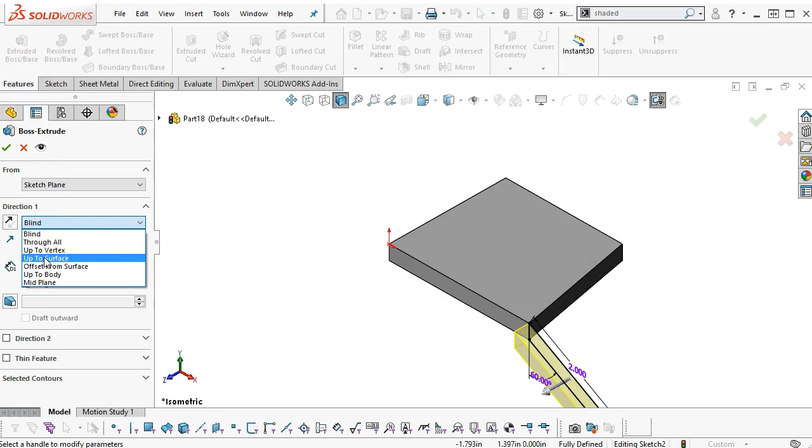And then for the extrusion back, it's going to follow that edge we just created. So extrude, let's go up to surface. We'll pick our edge as the direction, and then the surface where it terminates be along that side. All right, we're not given anything additional in the way of information, so that looks pretty close. Let's go ahead and save this.

All right, so top pattern. Another place that we can use the rectangles, corner rectangle. Pattern is 1.5 by 1 inch, and 0.75 off of the front, and 0.75 off of the edge.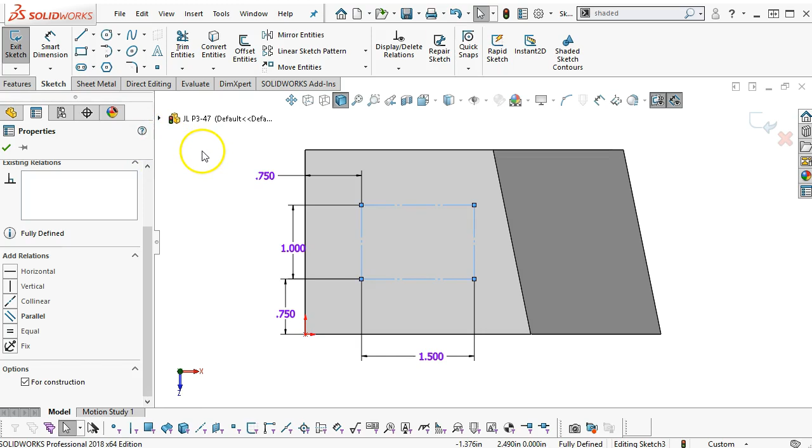Okay, I'm going to right click, select chain, and all of that goes to construction. Alright, and then we could have done the whole wizard, but we'll just go ahead and punch these through. 0.25 and Control C, and Control V, Control V, Control V. Make sure all those are set to equal, and then drag to the corner. Features, extrude cut, and we'll let it go up to next.

Alright, so close to the same geometry. Yeah, it looks like it followed the same lines down. So that being the case, let's go ahead and show face. And because that's going to be a little weird on that angle, let's go ahead and extend, because it's going to work out to be a projection to that edge. And we're at the angle, so it's not going to be exact. Let's see if it's falling along. So yeah, it's falling along parallel. That's kind of what I expected.

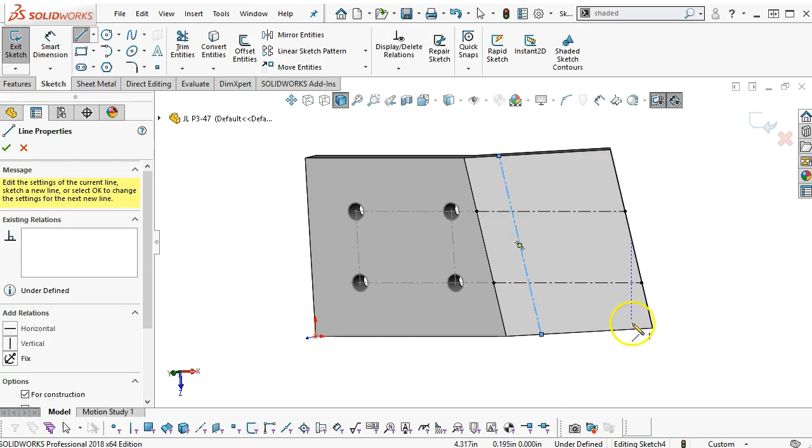Alright, so sketch, we bring out the center lines. From there down, from there down. And then if we're following the angle, we'll have two that go that way. Alright, and 0.5 from the lower edge, and 0.75 between the intersection. So looks strange, but as long as it works. And kind of missed my intersections there, but close enough.

We'll window pick, set all to equal. Could set a global variable if we needed it, but with everything already did equal. Looking for intersections. Alright, so with intersections, we'll grab the two lines and then go to intersection. Alright, so center line, drop something there. Intersection, line, center point, intersection, line, point, intersection. So that one got coincident, or since it moves, it did not make equal.

Features, extrude cut, up to next. Okay, and then we can go back and hide sketch 3. So another one of those strange parts, going to have some multi-axis. That's going to have some material that we're going to have to contend with, do something with.

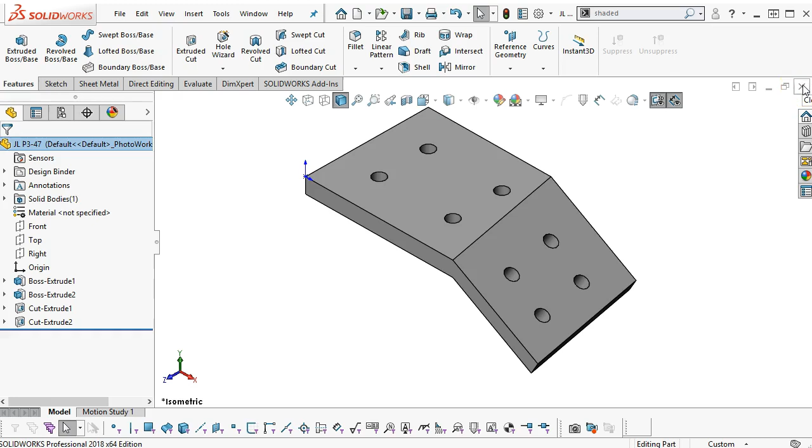So all of these parts, we really just need to look at what the capabilities, what the functions are inside of the assembly, and see if we can come up with a better way for manufacturing, make it more efficient. Alright, the strange compound angle on the corner. So we'll generate the outside shape. This is a good one for a 3D sketch.

So I'm going to introduce the 3D sketch again, or also new part, and this is in metric. And one of the things with the 3D sketch, up to this point I've told you that we're going to stay away from 3D sketches, that they come with a different set of rules. Alright, so 3D sketch, I'm going to go ahead and center this.

So inside of the 3D sketch, whenever you start to draw a line, you're going to get a floating coordinate system, and as you hit tab, that coordinate system is going to go from XY to YZ to XZ or thereabouts ZX. As you shift through each of those coordinate systems, that lets you sketch freeform in whichever direction.

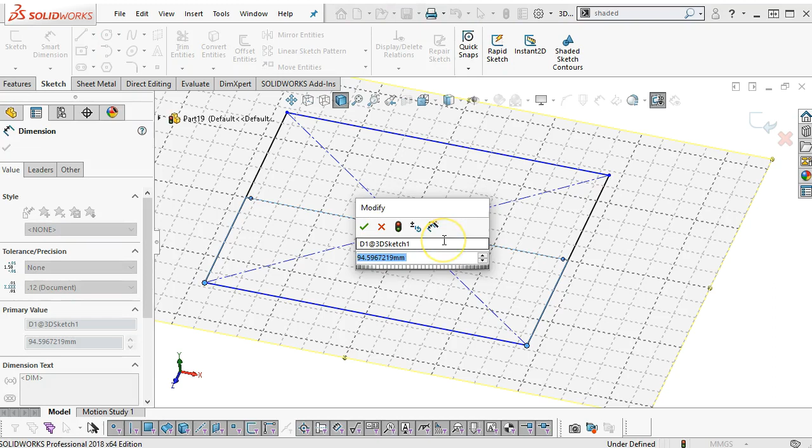If you pick a plane, it will take you into a quasi 2D plane. I'm going to go ahead and set this as a center rectangle, and we'll set the direction for... we're at 50 and 44. Alright, either that or I'll try that again. Oh, I guess I reselected 44. Okay, so if I want it to look like the picture, I need to reverse those.

Alright, so clicking out of the plane, and when I highlight these, we have vertical on plane 6, and basically plane 6 was the top plane inside of that 3D sketch.

Alright, so I want a line, I want it to be vertical, and so we're going to just bring these corners up, bring that one across. It's lying along X, so I can set a direction of along X, or not. It's not cooperating already, so that being the case, we'll go to setting equal.

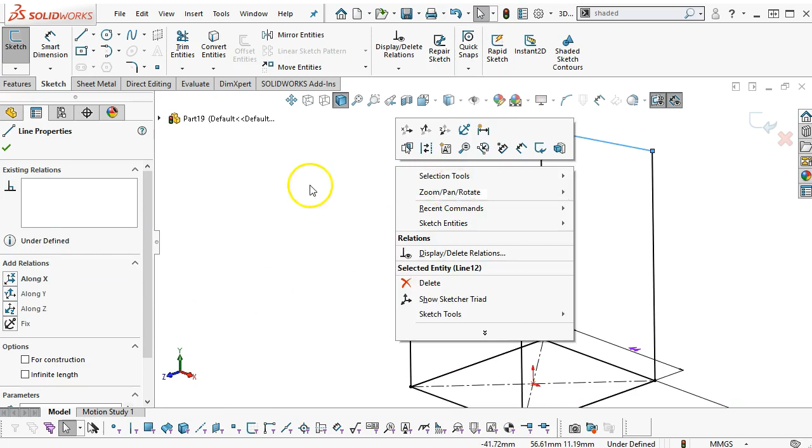Alright, so direction up, hopefully let one of these go along X. Nope. Okay, so that being the case, I'll jump back into equal, and then the lines will connect. And what I'm doing is I'm sketching in that 3D wireframe.

Oh, and did I make those center line? Yeah, I did, guess I did something there. So have the center lines. Alright, so 76 on the height.

Lower edge, now we have 30 degrees on the corner, so the reference dimension isn't popping up inside of the 3D sketch, or I'd have to make it a 2D sketch on that plane, or generate a plane there.

So we'll just take the adjacent angle of 60 degrees, go ahead and put that in place. Alright, so then one angle goes from there to there, one from there to there, and one from there to there. So what that does is it gives me a sense of the geometry, where we're dimensioning from.

So 26 at the bottom, and 16, and then 27, right, and then from the center to the vertex. So from there to there, and from there to there.

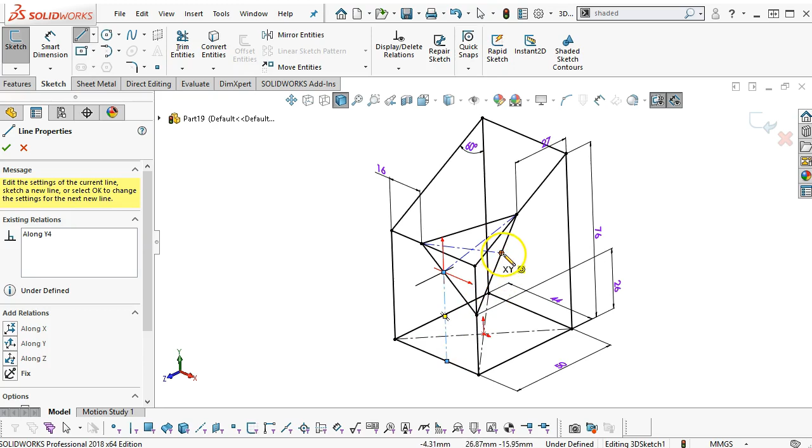Alright, so into the dimension, point to point, and it's trying to lie along that edge. So not exactly the desired result. So let's drop a center line that we can drive to. Alright, and that is an along Y and an along Y.

Okay, so 14 millimeters and 12 millimeters will be the intersection of that face. So where is the midpoint? Select midpoint. Just so happens that that midpoint is pretty darn close, so we could have gotten away with the midpoint, right? But given the dimensions, without the inference, we kind of have to go with that.

Alright, so since this isn't part of the assignment, it's kind of the concept. Let's take it to another level. I'm going to make this even more complicated. We're going to do this in surfaces.

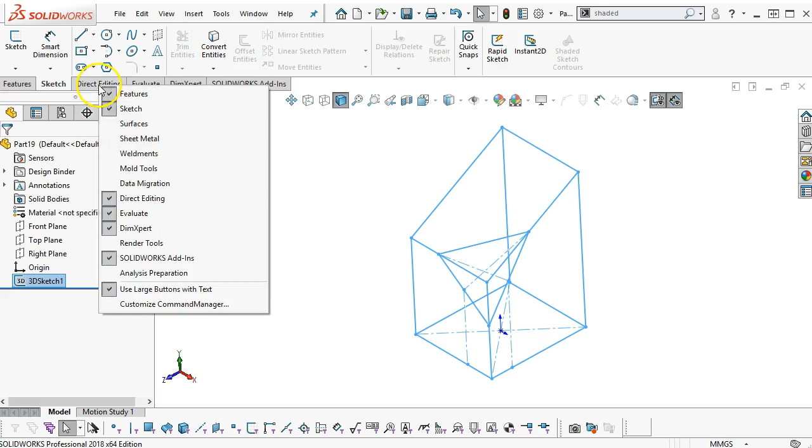So one of the things that SolidWorks does, as a matter of course, is when we generate a solid, it's generating a watertight volume for our solid, and it consists of these surfaces. And then in the end, once the geometry is watertight, it gets thickened or filled, and the outside surfaces are kind of a secondary item.

So I want a... let's see, filled surface or boundary surface. So 3D sketch, no, let's just go with the boundary. And so whenever we see the, what is this one called? The selection. We're going to make those picks.

And because these are multiple lines in the same... so that would be one method. And basically a planar surface. Oh, I really didn't want it to consume that. Alright, so let's see if we can share it again.

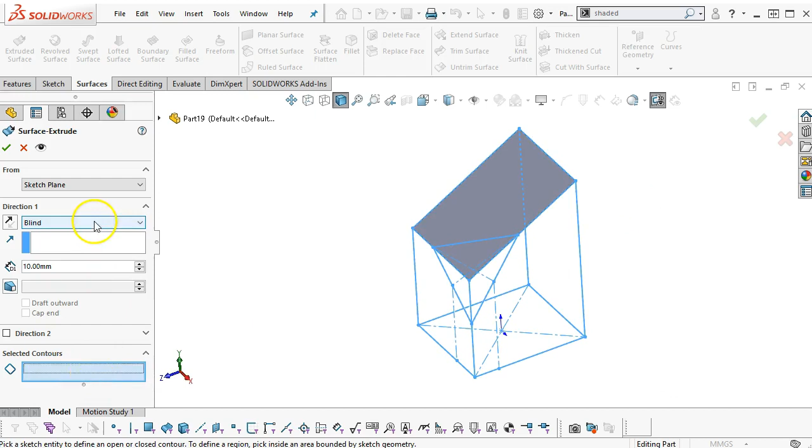An extruded surface would be the selected contour, but only thin features are permitted, and that didn't give me the edge. So I think we're going to have to stay with boundary on that one.

Alright, so line, accept, and these don't have any curvature to them. So I wonder if that's good enough for the selection. Alright, so we can do 2.

There it is, there's a planar surface. So bounding entities, if it'll allow me to select - no, probably not, now it's going to try and pick everything. The planar surface would be if I had an enclosed region, and even I don't really think that's going to apply, so we'll see. Nope, just too much geometry.

So unless we want to create sketches with cleaner geometry, I think boundary surface is going to be our best choice here. So first item in the selection, second item in the selection, go ahead and create. And it found my center lines.

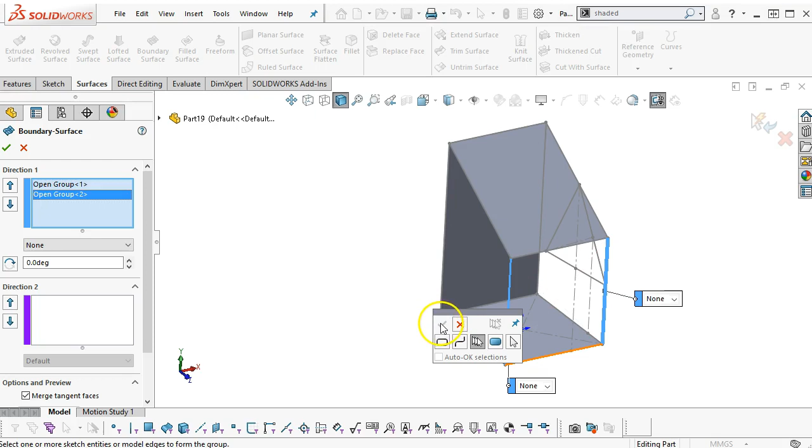Okay, well that fills it up, creates it. So how about the vertical then? Nope, all right, so again, maybe just getting too complicated in the selection or the angles.

Okay, so we've got all of our planar surfaces, and notice that we're starting to accumulate boundary surfaces. Alright.

So direction 1, and oh, nope, needed to jump over to the next one. Okay, that'll work, got a little button happy there. Continuous group of entities.

Okay, so let's clear selections and start over. It's still picking. Interesting.

Alright, well we'll stay with that. See if that's happy. Nope, it crisscrossed. No.

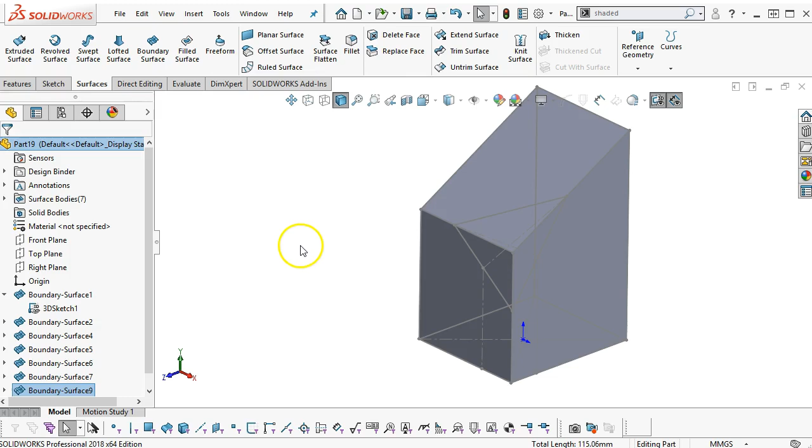So I tell it to trim the surface, the trim tool, and actually, it was surface 9.

Okay, is the angle, and we're going to keep selection, so I want to keep that face and let it trim. Okay, so I can kind of see down into that now behind the box.

And trim surface, trim tool is surface 9 again. Keep selection, trim.

And trim surface, nope, clear selection. And it's updating the names, so I'm losing track of my selection. Alright, so we hide the wireframe. Under boundary surface - yeah, at some point we want to save this.

Okay, so the fun part, we're going to knit all of these surfaces. Selections, highlight, make sure everything's in place. What knit surface does is it creates one connected surface.

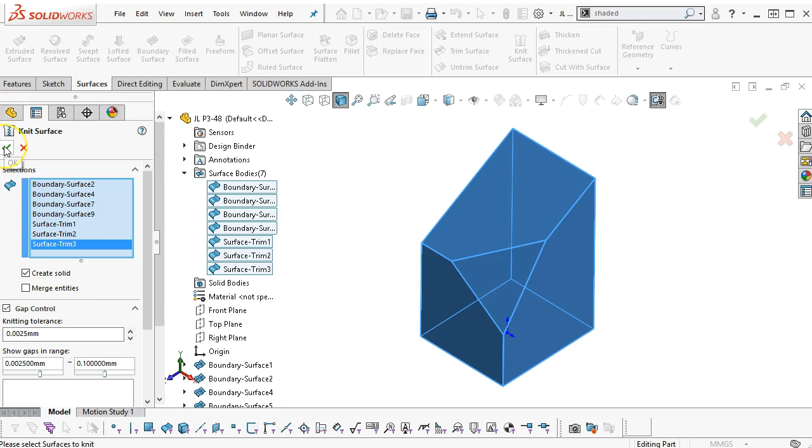If that surface is watertight, then it can also create the solid. It's looking for gaps and tolerance to complete the geometry. All right, so the long way around then is I have all of my surface geometry.

Which I can then add to a new folder, and the one surface knit that actually creates the solid. I can tell that it's a solid.

Let's go back just a little bit and do a cross section. All right, section view just looks like a hollow box until I roll back in front of the surface knit. All right, so that gave me my angle.

And again, more for an example of dealing with the surfaces. Usually there's a couple more that I can fit in there, but the boundary surface worked pretty good with the geometry. So I'm going to show, and hopefully I can rotate this around to where I can pick up that center line, and then it's going to be 8 millimeters, 20 millimeters deep.

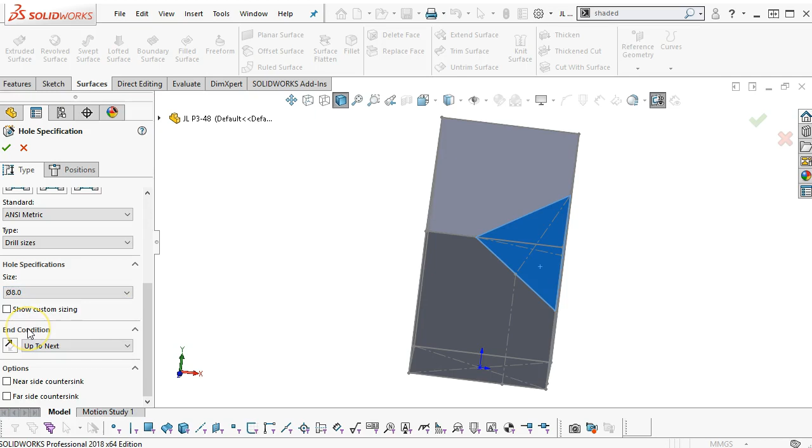Alright, so where would you use surfaces over just going ahead and creating the solids? The more ergonomic, the more the planar surfaces fail - you're looking at the planar solids fail, then that's when you're looking for getting into this geometry.

So anything that has the waves, has more intense geometry, would lean towards the other surface. Anything that is loft or swept, but then the lofts and the sweeps start varying in thickness and size as they go. Surfaces have less of an issue with those variations.

So again, not the best example, but a good starting example of I created a wireframe, we put the surfaces on it, and that selection tool.

Now that I think about it, let's go back into one of these. And that selection tool is called the selection manager. So when you see this, you have more than one possible selection in the geometry, and it's asking you to clarify. All right, and your options are closed loops, open loops, and then various groups. All right, so different way of looking at it.